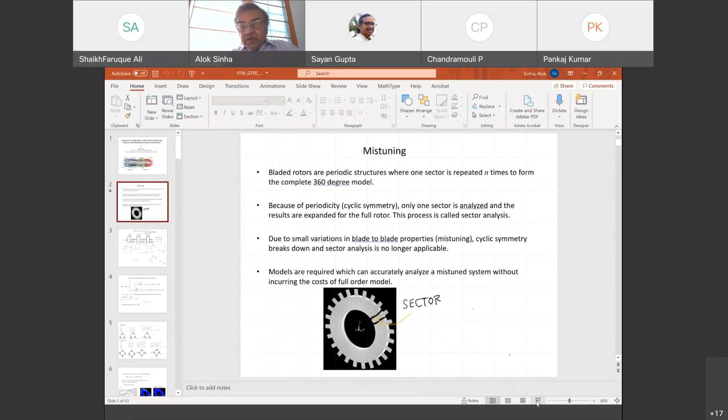Okay, so what do we really mean by mistuning? Bladed rotors are periodic structures. So here is an academic rotor with 24 blade-like structures. This is called a periodic structure, because there are as many sectors as the number of blades, and this is periodic since these sectors are basically repeated n times, where n is the number of blades, to form the whole bladed disc.

So therefore, computationally, I can just model just one sector and obtain all the dynamic characteristics, like natural frequencies and mode shapes, of the full bladed disk assembly. So that is very computationally efficient.

But because of inevitable small variation in blade-to-blade properties, which is called mistuning, cyclic symmetry breaks down, and then sector analysis is no longer applicable. Also, this problem is stochastic in nature—these variations are random, right? So just modeling one rotor is not enough.

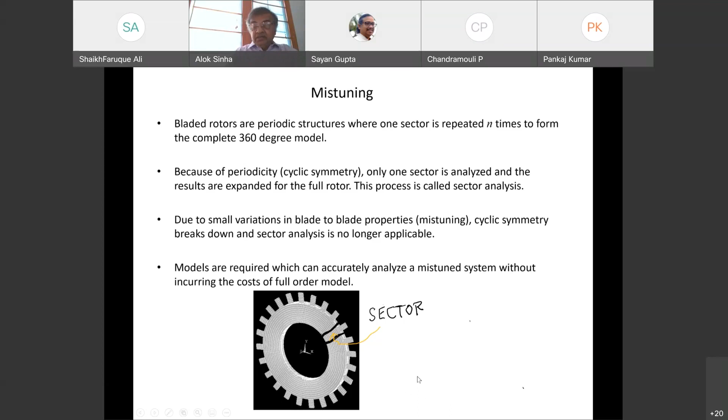You have to think in terms of probability distribution of amplitude—what is the probability that amplitude exceeds a certain critical value? So therefore, we have to develop a high fidelity reduced order model, and that's one of the main topics of the presentation.

Before I start, I want to discuss some basic characteristics of a rotationally periodic structure. Here is the most basic model of a bladed disc, where each blade is represented by one mode of vibration, represented by modal mass Mi and modal stiffness Ki, and Kc is the coupling stiffness. As I've shown in this dotted box, that is one sector in this case, and this sector is repeated n times, where n is the number of blades, to form the whole 360-degree bladed disc.

Now, since the sector is a single degree of freedom system, if all blade masses and modal stiffness are identical, I can come up with a single degree of freedom model, irrespective of the number of blades. And if you look at the stiffness matrix, particularly for a perfectly tuned system, this is a cyclic or circulant matrix—each row of this matrix can be obtained by a simple shift by one slot of the previous row, and that is a reflection of cyclic symmetry. So even though this model is simple, even when we do the finite element analysis of the full rotor, this structure of the model retains.

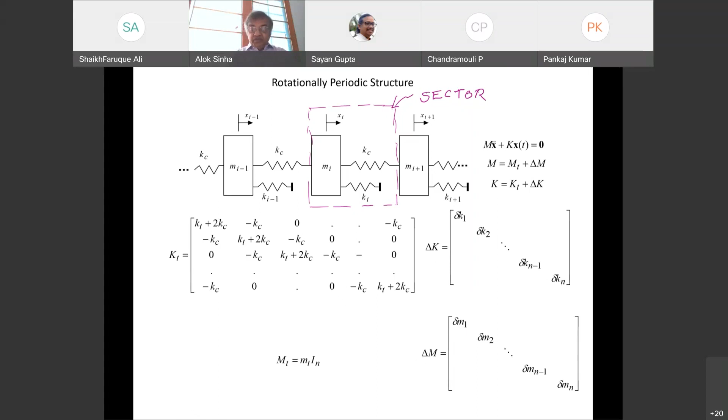Here the delta K is a diagonal matrix, is a scalar, and delta M, there is a change in mass matrix and stiffness matrix due to mistuning. So these structures have this important characteristic.

If I look at the eigenvalues and eigenvectors of a perfectly tuned system, in this simple model, I can come up with a closed form expression of eigenvalues.

So the point here is that there are repeated eigenvalues, and it is n minus 1 over 2 for odd number of blades, and n minus 2 over 2 for even number of blades. And these repeated eigenvalues define the characteristic of a bladed rotor, okay?

And so the eigenvectors turns out to contain constant interblade phase angles. So there are n interblade phase angles possible, where it is integral multiples of 2 pi over n.

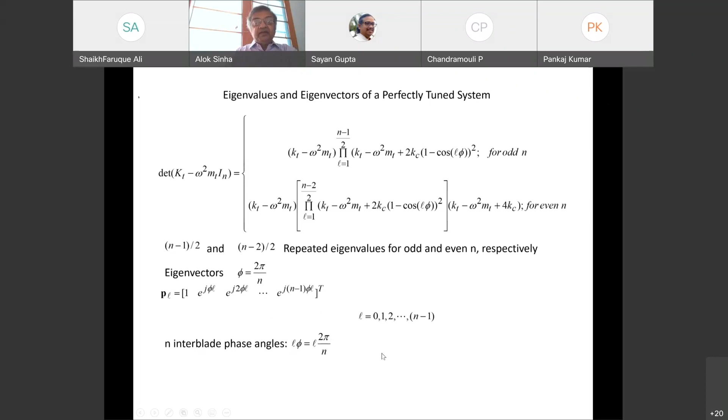So if I look at this case for n equals 3, there are 3 modes: all blades having same phase and same amplitude, then there is 120-degree interblade phase angle and 240-degree phase angle.

And it so happens that if you look at the 120-degree interblade phase angle and 240-degree interblade phase angle, these modes correspond to the same frequency. You can see there is a forward traveling wave and backward traveling wave, and the structure doesn't see any difference.

And there are repeated eigenvalues. So in the odd case, the 0-degree interblade phase angle is the only one that corresponds to an unrepeated eigenvalue. For even number of blades, you have interblade phase angles 0-degree, 90, 180, and 270.

90 and 270-degree interblade phase angle mode shapes correspond to the same frequencies. And here 0-degree and 180-degree interblade phase angle mode shapes correspond to unrepeated eigenvalues.

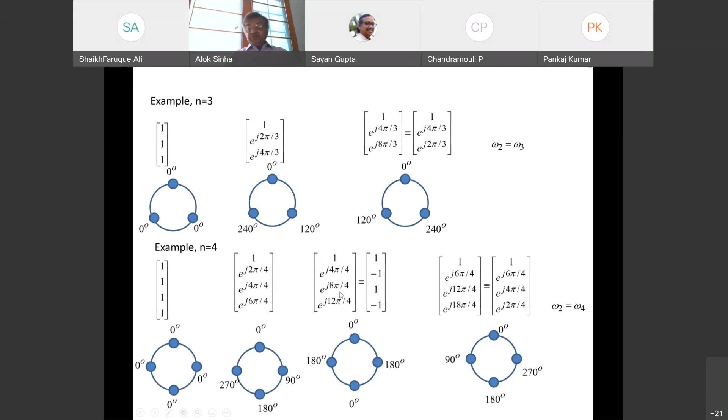So when eigenvalues are repeated, eigenvectors are not unique, right? Because any linear combination of those two eigenvectors corresponding to repeated eigenvalues is also an eigenvector. So in a perfectly tuned system, there is no unique eigenvector, but the moment it is mistuned, these repeated eigenvalues split, and there are unique eigenvectors.

And not only that, when the modes are close together, like you can see in the nodal diameter map, which is basically natural frequencies versus the interblade phase angles known as harmonic index, there are many frequencies close together.

So once it gets mistuned, there is a lot of modal interaction, and that can lead to veering or mode localization.

So here you have an example of mode localization. It's a very small change in the thickness of a blade, and you can have one mode where only one blade is basically vibrating, and that's a mode localization.

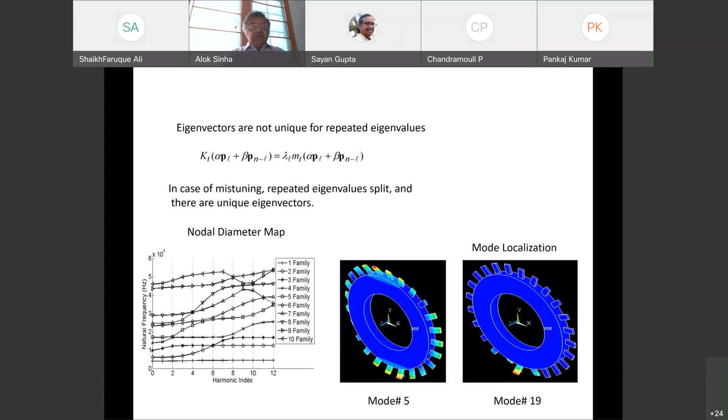However, in gas turbine applications, it's the forced response which is important, because there are always non-uniform pressure fields circumferentially, and when the blade is rotating, it automatically leads to periodic excitation.

And then if you do the Fourier series expansion, there are integral multiples of rotor speed, which turn out to be possible excitation frequencies. But for resonance in this structure, two conditions have to be satisfied.

First of all, natural frequency has to equal one of the integral multiples of rotor speed. Secondly, the associated mode shape, where this natural frequency has a resonance or frequency matching, must be contained in the spatial variation of the pressure field.

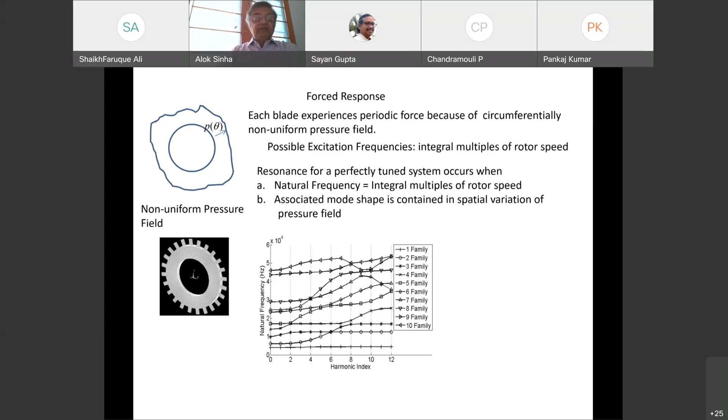Otherwise, energy will not get transmitted to that mode for a perfectly tuned system. So this is what is very important from a forced response point of view, which is present in a gas turbine engine.

There are two issues. A lot of people in the literature say vibration mode localization. But if there is mode localization, that is mode shapes are localized, it does not necessarily mean that forced response will be localized. So there are two different mechanisms that we have to be aware of.

So if we look at the forced response, in a very simple way, if I look at the transfer function, that is from the response of a blade to the excitation at a particular engine order excitation or particular interblade phase angle, in this case the transfer function will have a numerator and denominator.

For a perfectly tuned system, numerators are all equal, and there are many pole-zero cancellations, because this denominator will be essentially 2nth order, right? It's n masses, so the number of eigenvalues will be 2n. But there are many pole-zero cancellations for a perfectly tuned system, and essentially it behaves like a single mode, single degree of freedom system. Okay, but the moment it's mistuned...

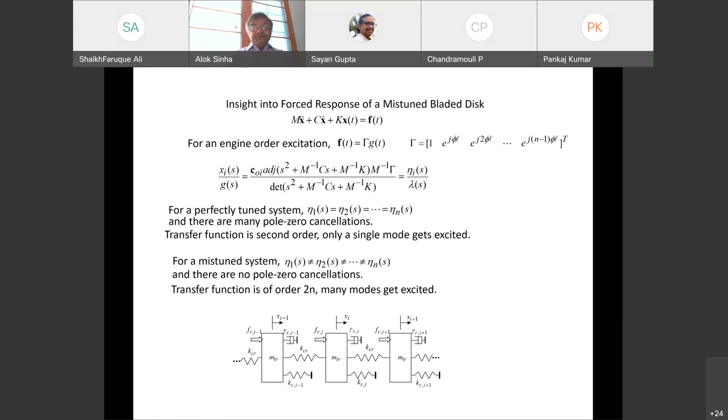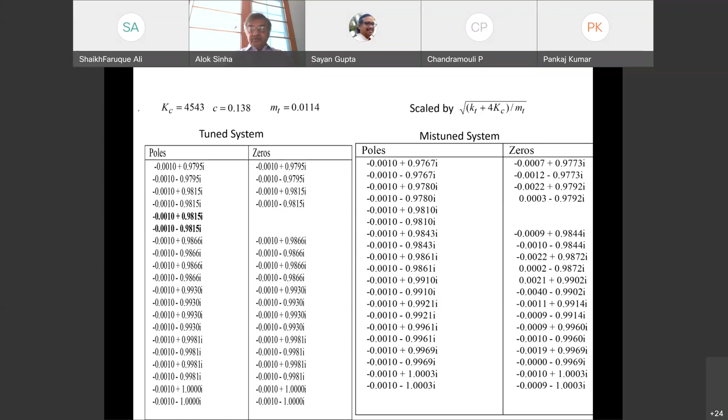Here are examples of pole zero cancellation for a tuned system. Only the poles, single pole, complex conjugate poles become effective, and it acts like a second order system. Whereas in a mistuned system, there are no pole zero cancellations, so the order of the system increases, and the energy can get transferred to many modes. So that is the mechanism.

So now let me get back to geometric mistuning. This is an example of an integrally bladed rotor, or blisk, chosen because it's aerodynamically efficient. There are reduced number of parts, which is very favorable, but it has very low damping in the system, and there is blade to blade geometry variation.

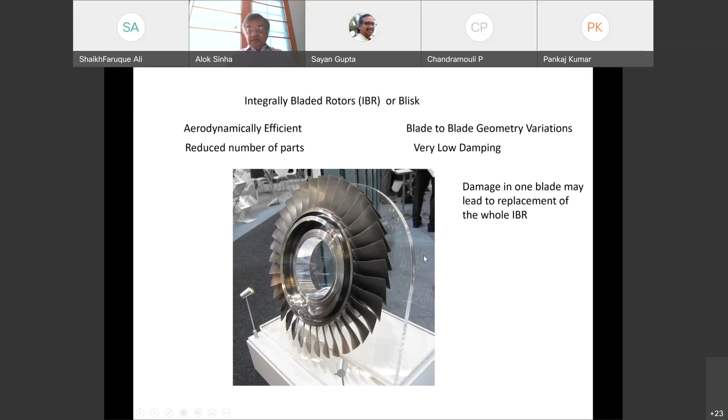So when there is a lower amount of damping, this mistuning effect, or vibration localization due to mistuning, is an even bigger problem. And another disadvantage is damage in one blade may lead to replacement of the whole IBR. So that's the integrally bladed disc.

So how do we develop the reduced order model for that? In this example, there has been a lot of research. I think the first paper on mistuning occurred around the early 60s, so almost 60 years of research on mistuning has been going on.

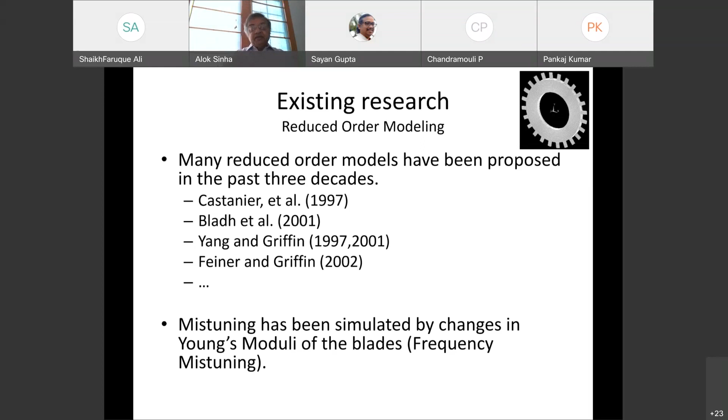More recently, in the last 3 decades, many efforts have been made to develop a reduced order model. But all these efforts focused on modeling the mistuning by change in frequency alone, where mode shape change in the blade was neglected. It seems like it worked very well for many systems. So what is frequency mistuning?

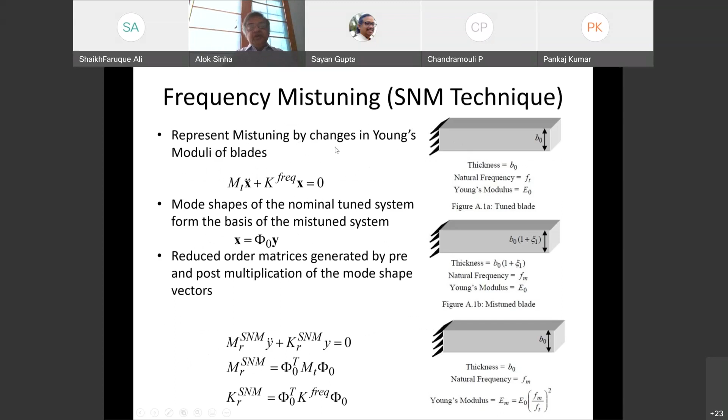We represent mistuning by a change in Young's modulus of the blades. So we have a nominal thickness geometry B naught for a blade, and if this blade's thickness changes by some amount, its geometry is changing. What we do is find the natural frequency of this blade, then revert back to the same thickness of the blade, but change the Young's modulus of this blade to match the frequency of the mistuned blade.

So that is what frequency mistuning is, and based on that, the SNM technique has been developed to create the reduced order model. Quite simply, in this case, there is no mistuning in the mass matrix, just the stiffness matrix, which is denoted as K frequency.

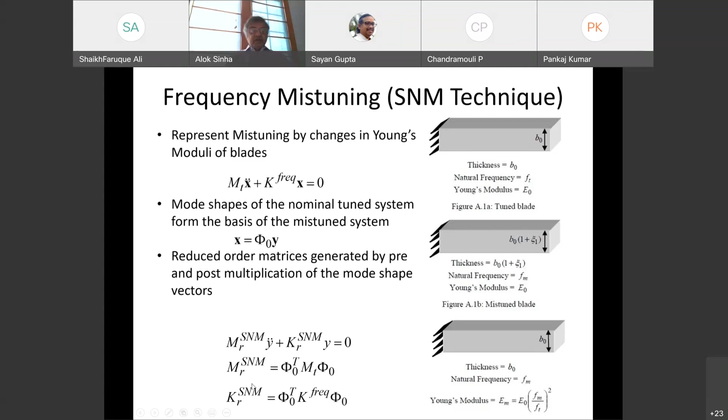Then we choose a certain number of modes of the tuned system, represented by matrix phi naught. That becomes my approximation, where y is the modal coordinate. And then I can come up with the reduced order mass matrix and reduced order stiffness matrix.

So when this method was applied to geometric mistuning, people were not able to get a good reduced order model. It was very frustrating to many researchers, because any mistuned mode is a linear combination of all the tuned modes, since tuned modes are a complete set of eigenvectors. So people were wondering why it wasn't working, because in SNM or frequency mistuning, you are trying to represent a mistuned mode as a linear combination of tuned modes.

But the problem is that we do not want to take all the tuned modes, right? So the idea was to consider only those tuned modes which are in the frequency range of interest. That approach was not working when there is geometric mistuning, which leads to simultaneous and dependent perturbations in both mass and stiffness matrices.

So I came up with a new approach, which I am calling Modified Modal Domain Analysis. Essentially, modal domain analysis required a large number of modes, and because of geometric mistuning, we needed to move in the vertical, orthogonal direction. That's what this MMDA does.

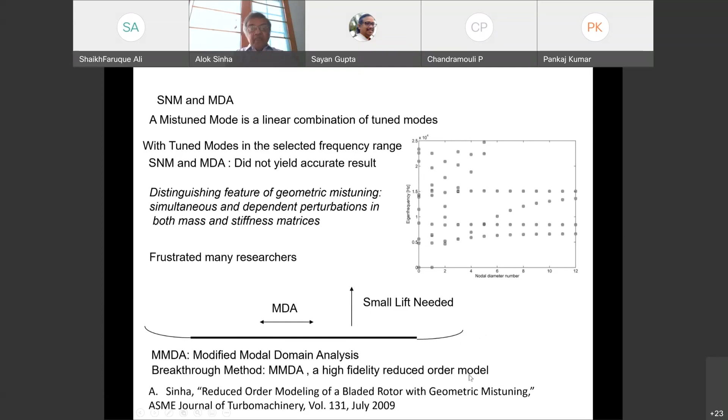This MMDA is based on proper orthogonal decomposition, POD, of coordinate measurement machine data on blade geometries, and we only use sector analysis using ANSYS and a solid modeling model.

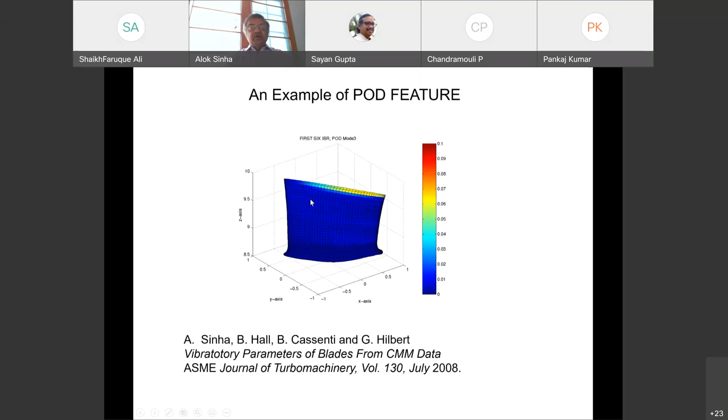So this is an example of a POD feature, based on actual CMM data. We have the coordinate measurement machine, and then we do the singular value decomposition, and I can get a POD feature. Here, the color bar indicates the magnitude of the geometry change. So that's one of the POD features.

Okay, so in this MMDA, the modification is that in my basis vectors, we have Phi1, which was in the original reduction, that is R tuned modes with blades having average geometry. In addition to that, I created more basis vectors, and they are R tuned modes with Phi-L, tuned modes with blades having perturbed geometry along the POD feature or mode that I want to consider.

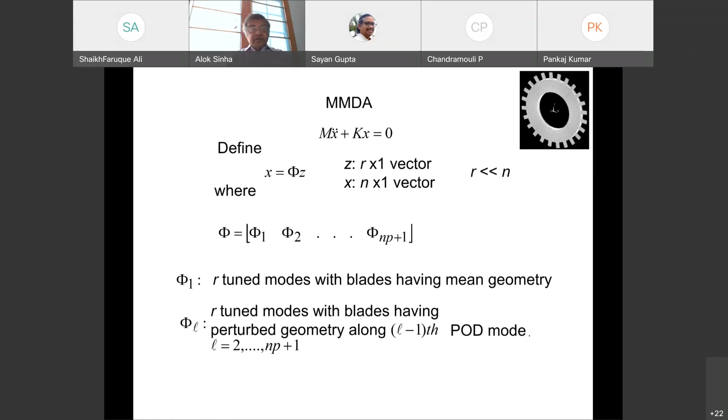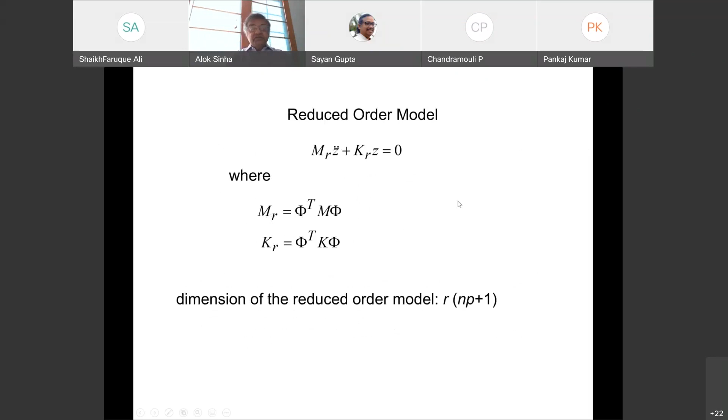So NP is the number of POD modes that I am considering. The geometry is perturbed, but again, all blades are perturbed by the same amount, so I can still do the sector analysis. This is important because industrial scale bladed disk finite element models have millions of nodes, so we really want to avoid the full rotor analysis. Then we have this reduced order model where I have a reduced order mass matrix and reduced order stiffness matrix. These are the sector analyses required by MMDA.

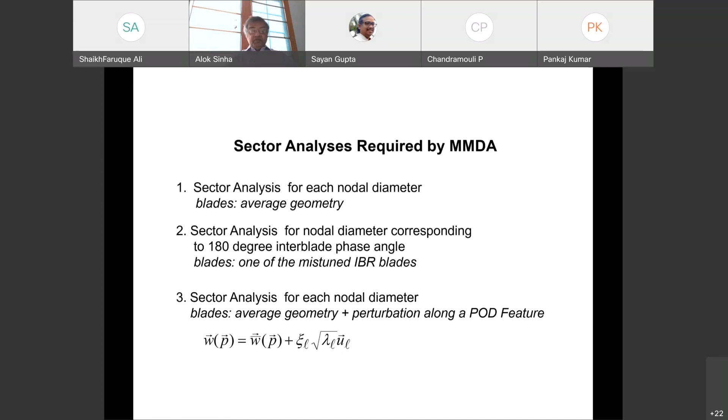So for the average geometry, we do the sector analysis for each nodal diameter. And then we also do sector analysis for nodal diameter corresponding to 180 degree or 0 degree interblade phase angle blades. I do this for each mistuned IBR blade, and then subtract it from the mass matrix and stiffness matrix of the average blade to get the delta M and delta K due to mistuning. Then I also do sector analysis for each nodal diameter where blades have average geometry plus perturbation along a POD feature. So these are the data that we have to generate using ANSYS.

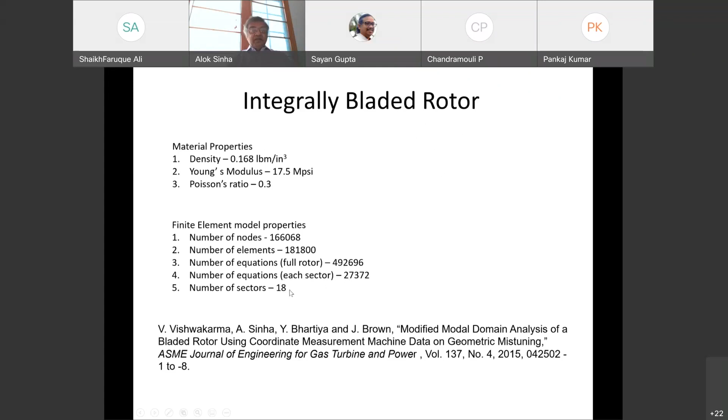So I'm going to present an example for an integrally bladed rotor, an industrial scale integrally bladed rotor, using actual coordinate measurement machine data. The full rotor model has a number of nodes, 166,068. So for each sector, you can see the reduction in the number of equations for each sector versus the full rotor. And there are 18 blades.

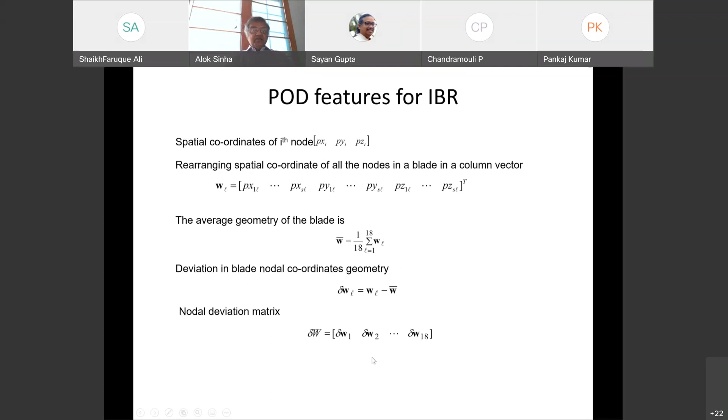Okay, so how do I calculate the POD feature? If I take the spatial coordinates of the ith node, and then rearrange all the spatial coordinates of all nodes in a blade into a column vector - this is for the lth blade, one blade - then I can calculate the mean over all 18 blades, and then calculate the deviation in blade nodal coordinate geometry. Then I stack them up: the first column is delta W1 for the first blade, delta W2 for the second blade, and delta W18 for the 18th blade. Then I do the singular value decomposition.

And then POD features are the column vectors of this matrix U, and weights of the POD features, the singular values, are sigma, and here it is plotted for this so-called Purdue rotor POD. You can see the singular values, and the first few features are more important in representing geometric mistuning, but even the smaller features are not dying out - they are still there, although small.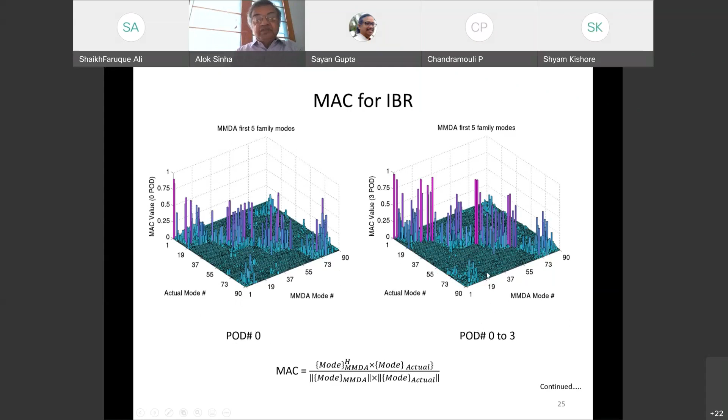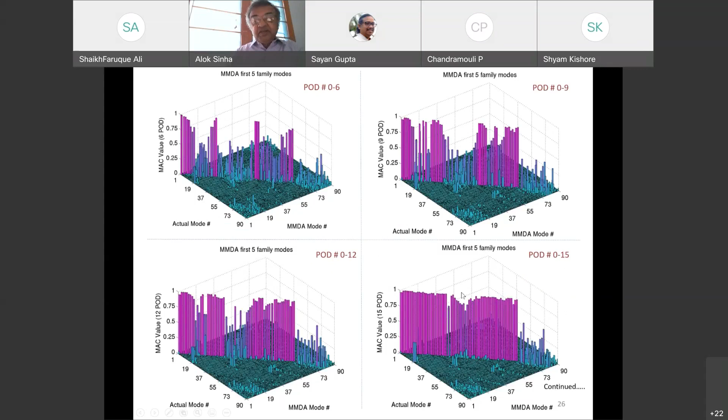MAC has to be 1 for exact match of the mode shapes. As I increase the number of POD features, the results are getting better. When I have at least all the 15 POD features, things are looking very good. And when I consider all the POD features, the reduced order model looks good, almost exact. And that was not the case for the frequency mistuning modeling.

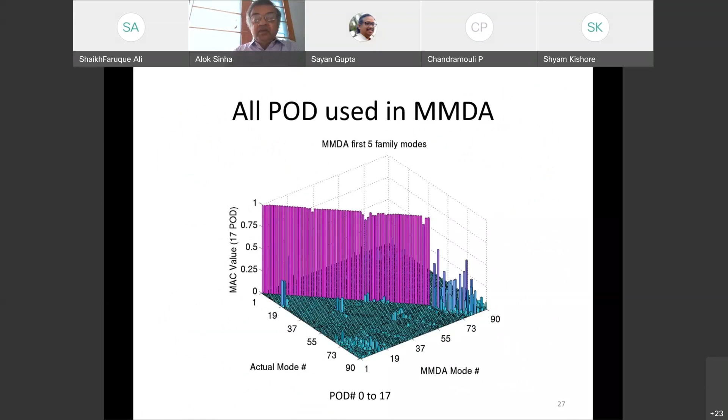And here are the frequency deviation results. Are there any questions?

Yeah, Pankaj, can you mute yourself? Okay, so shall I just continue? Are you listening? Is everything going okay? Is the technology working okay? Yes, Professor Alok, you can continue. You can have a question answer session at the end of the presentation.

Okay, good. So we have this frequency deviation with respect to tuned frequency. And again, as I am increasing the number of POD features in the reduced order model, results are getting better. Actual means result from the full 360-degree ANSYS analysis, and with 17 POD features, it matches the actual frequency deviation very well.

Now, here are the results from FMM and SNM, the reduced order model approaches using frequency mistuning. You can see large error here in frequency. So here I am using error D, which is frequency deviation error. You can see how I am calculating this. Now, in the literature, most of the previous papers use this measure.

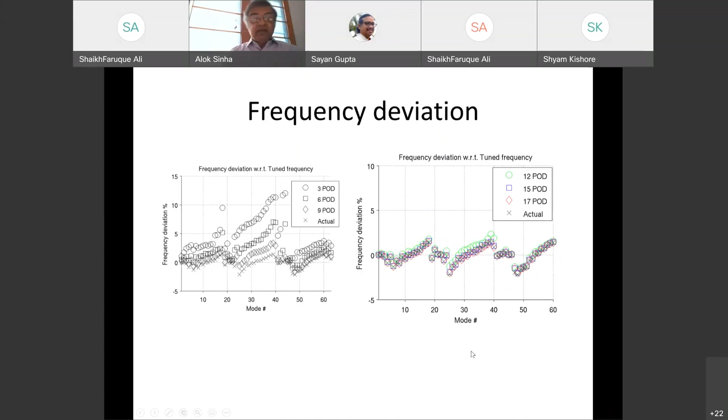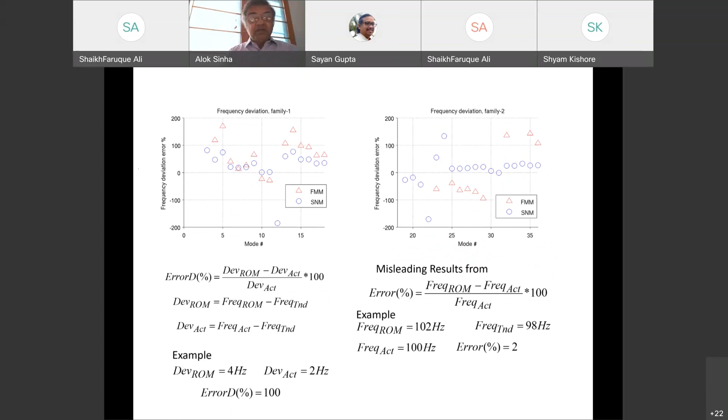So if you do error D percent, which I have defined, I'm trying to predict a 2 hertz change, but my reduced order model says 4 hertz. So that will mean 100% error, right? So in that measure, FMM and SNM do not do good. This measure also says that when you are not able to predict frequency deviation, you will not be able to predict the mode shapes. And this good match is shown by using the very stringent, very tough measure like error frequency deviation percentage error. So that shows that frequency mistuning is not adequate to model geometric mistuning.

And here are the mode shape comparisons from frequency mistuning approaches, so-called SNM and FMM, and you can see the MAC are not good. SNM takes more number of modes and is better, but is still far from being perfect. FMM is totally off.

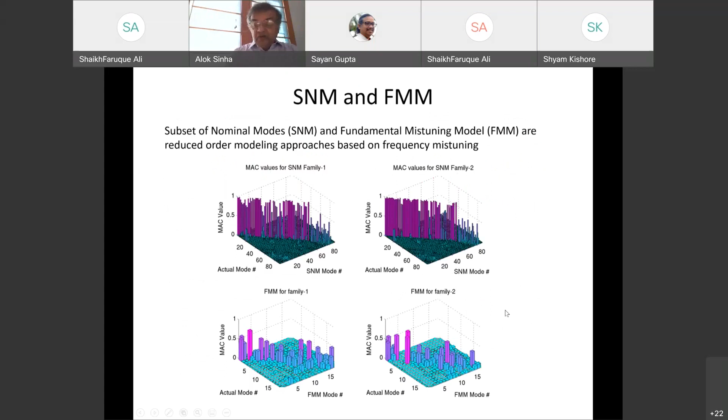And here are the forced response results based on the reduced order model. This also shows you the effect of mistuning. This blue line is the tuned system response. As I said earlier, for a tuned system, energy just goes into one mode, and you can see that this behavior is like a single mode resonance, right?

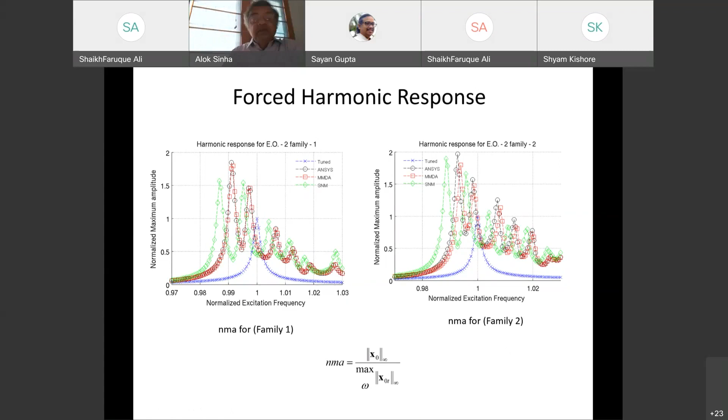Now, the moment it becomes mistuned, energy gets into many modes, and there are multiple peaks. If you look at the ANSYS results, the full 360-degree analysis, there are two harmonic responses depending on the resonant frequency that I am using. You can see there can be amplification of amplitude by a factor of 2, right? And again, the frequency mistuning approach does not predict the forced response well, whereas the MMDA results are very close to the full 360-degree analysis.

Okay, so next I'm going to talk about system ID. Is there a time limit? How much time do I have? 15, 20 minutes? Yeah, you can go ahead with another 15 minutes, no problem. Yeah, okay.

So this is system identification for using blade tip timing data. We want to predict the vibratory behavior of blades at the design stage. We have 4 components to do this: a good model of the mass matrix, stiffness matrix, damping matrix, and the forcing function.

So we can claim that MMDA provides a high fidelity reduced order model. We have a good model for mass matrix and stiffness matrix, provided we know the geometric mistuning, that is, we have the CMM data available. Damping matrix and forcing function still cannot be accurately computed in spite of advancement in CFD techniques.

When blade geometries are not easily measured, there is a need to estimate blade alone natural frequencies and mode shape. So to estimate mistuned natural frequency of each blade, many techniques have been developed with the assumption that forcing functions are known, which can be valid for traveling wave type excitation commonly used in laboratory settings.

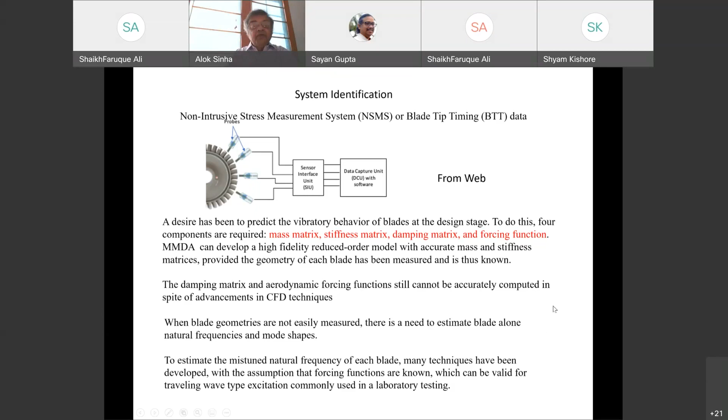First of all, we developed an algorithm for identification of forcing function from measured vibration data. The approach is to represent the sinusoidal forcing function as a solution of a second order differential equation. So we can convert the force estimation problem into a state estimation problem, for which we have used a Kalman filter.

However, here we have assumed that there is no modeling error; the model is perfect. We published 2 papers, and one of the key findings is that the Kalman filter approach is very robust to measurement errors.

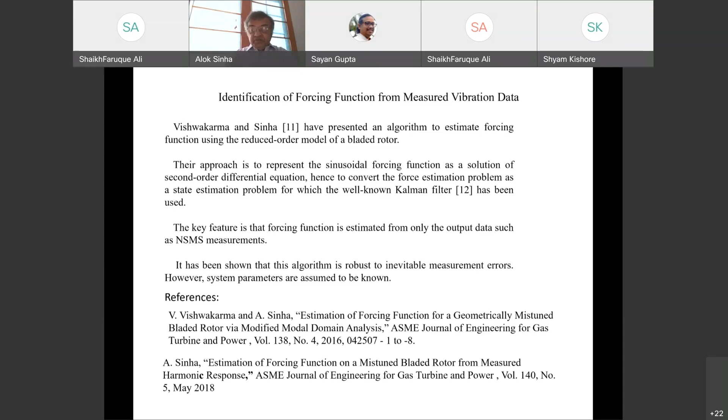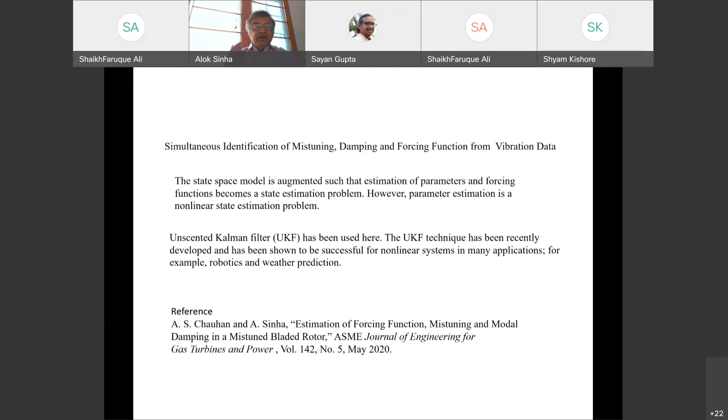So I'm going to talk briefly about simultaneous identification of mistuning, damping, and forcing function from vibration data. Here I'm going to use the unscented Kalman filter, and it has been shown to be highly successful for nonlinear systems in many applications. So that's the model of the unscented Kalman filter.

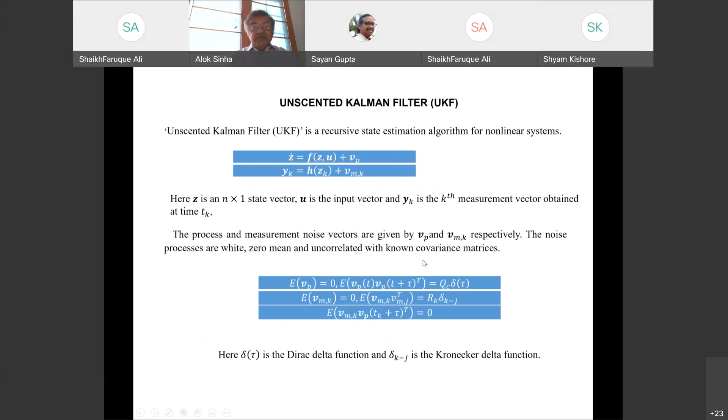We create the statistics of the states before the measurement is taken, and based on these statistics, I can determine the so-called Kalman filter gain K. After the measurement comes, I modify my estimate. That's the way it works.

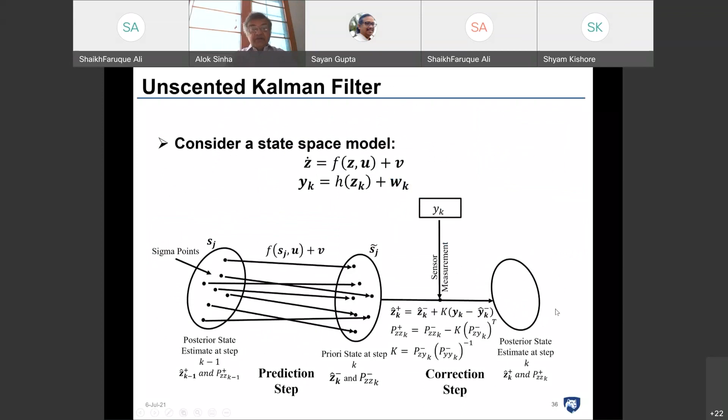We applied it to our simple spring mass model, and we are going to do simultaneous identification of the damping, forcing function, and mistuning.

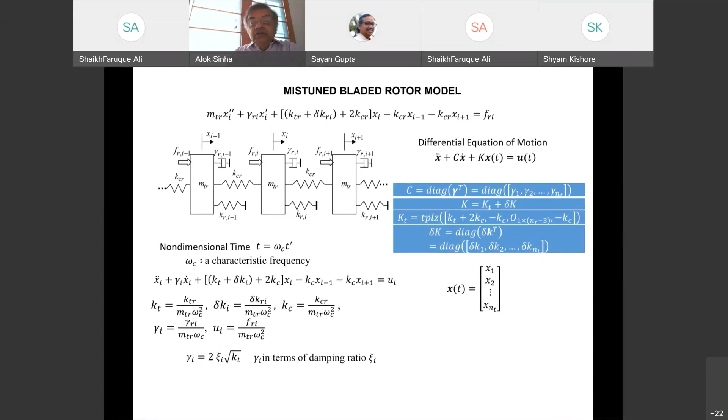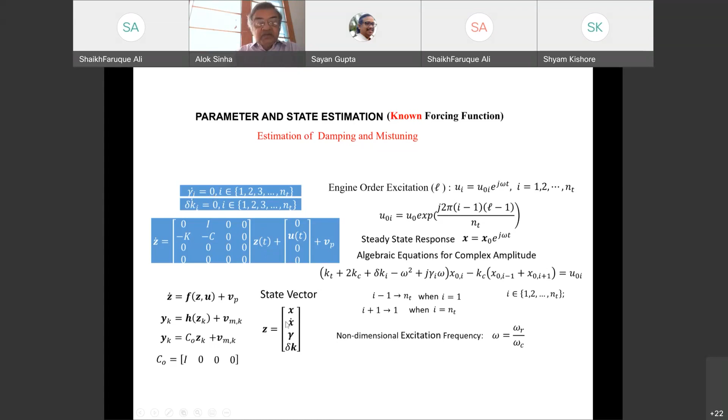So we have equations: gamma dot is 0, and it becomes a state equation, and delta K dot is 0. That's another state equation. Those become, so I'm doing the state estimation here.

Here are the excitation, known excitation, sinusoidal excitation with L equals 2. So engine order excitation for a 10 blade, interblade phase angle will be 2 pi over 10, 36 degrees.

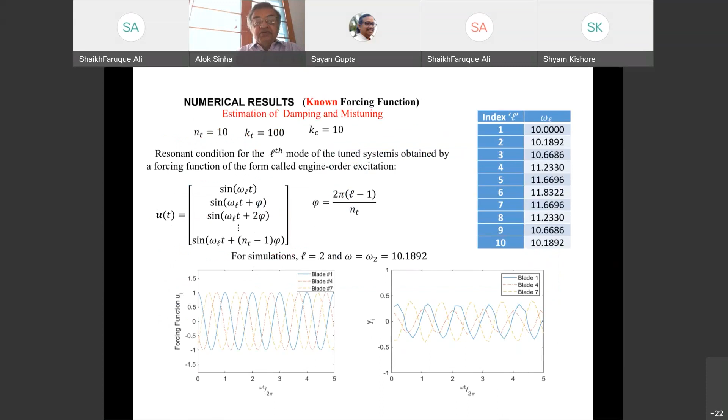Okay, and these are some of the measured responses with noise and everything. That's the result, that's the response we are using to get the damping coefficients, and it predicts very good results. Here the red line is the actual value, and the algorithm is giving good identified damping coefficients.

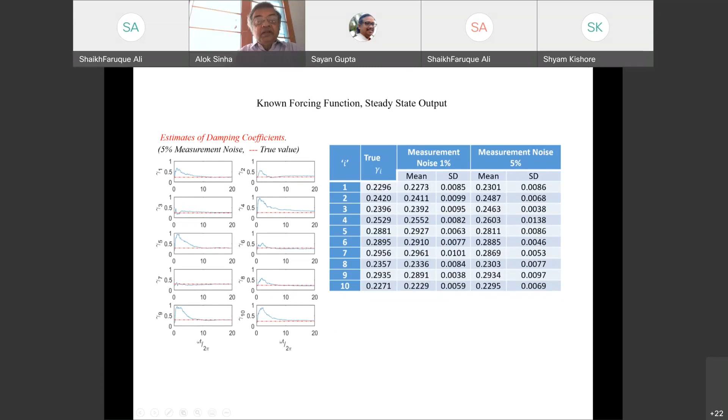And similarly, it identifies the mistuning very well. These results are for 2 levels of noise.

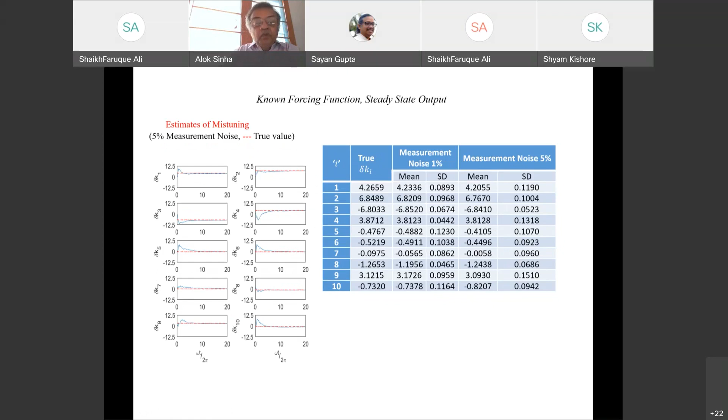Now with unknown forcing function, we have this equation u double dot plus omega squared u equals 0, so u is the unknown forcing function. I have augmented my state space model with 2 additional states, u and u dot. Now in this case there are 3 NT unknowns: gamma I, delta Ki, and U0I.

And we have only 2 NT algebraic equations if I use the steady state response. So when we use the steady state response to do this simultaneous identification of damping, mistuning, and forcing, it was not working, and we realized that steady state response does not have sufficient information. Therefore, we use the transient response, that response before it settles into steady state.

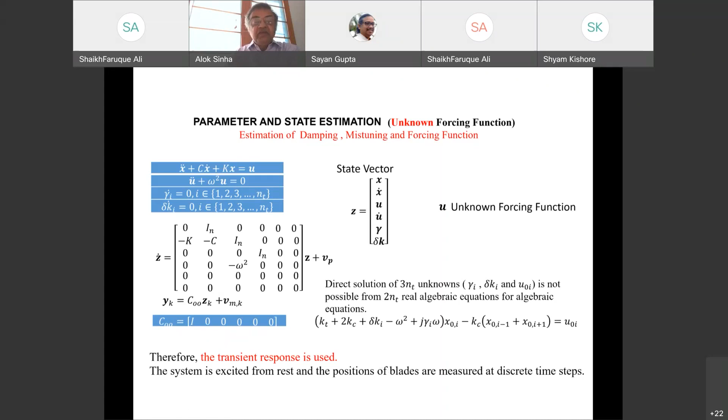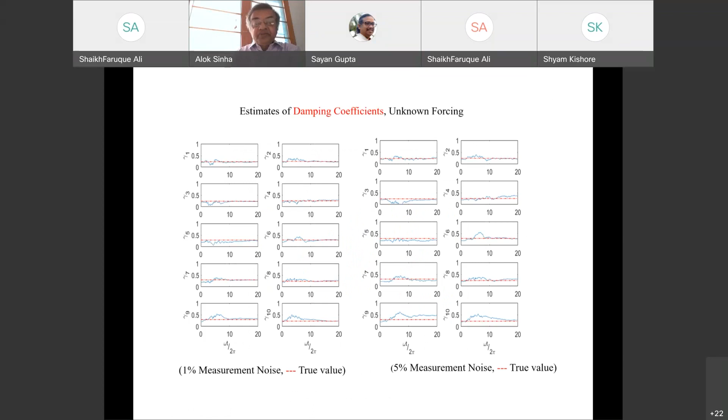So this is the data that we use, measured data, transient response, and we find that results are pretty good. Again, the damping coefficients, unknown forcing, we are getting very good results. Mistuning, we are able to do the identification very well.

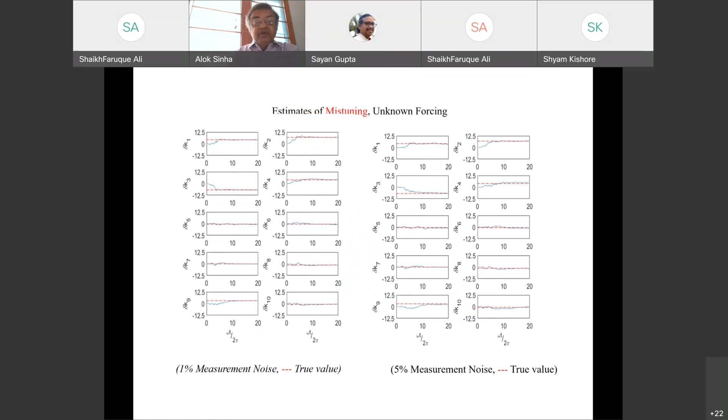And this is the estimation of forcing function. So this is delta F1, which is the error. It should be 0 ideally.

Okay, so it looks like it's not working that well. But when I look at the Fourier coefficients, the results look very good.

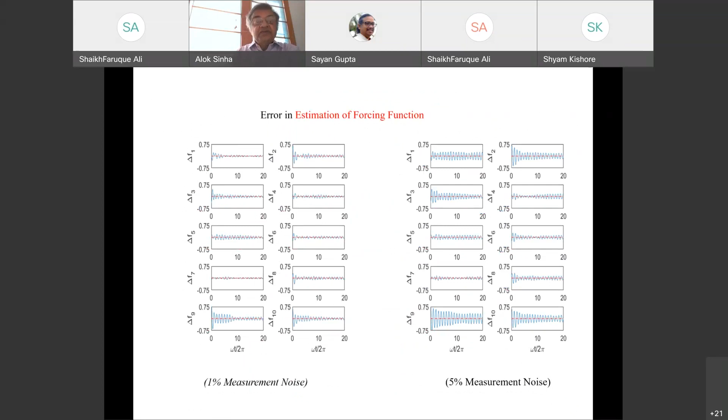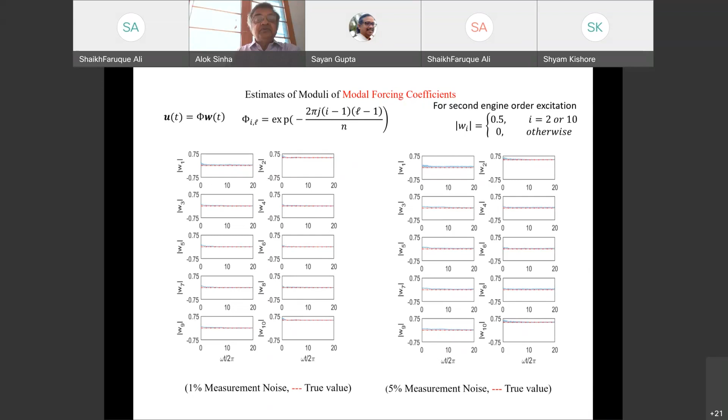So if I look at the Fourier coefficients, since it's a second engine order excitation, that's what we have provided. For that, only the second and 10th coefficient should be 0.5, and the others should be 0. And when I look at that measure, indeed, the results look very good.

So we are able to identify the unknown forcing function. We have two different approaches. When the forcing function is known, we can do mistuning and damping using the steady state vibration. But when the forcing function is not known, we must use transient vibratory data.

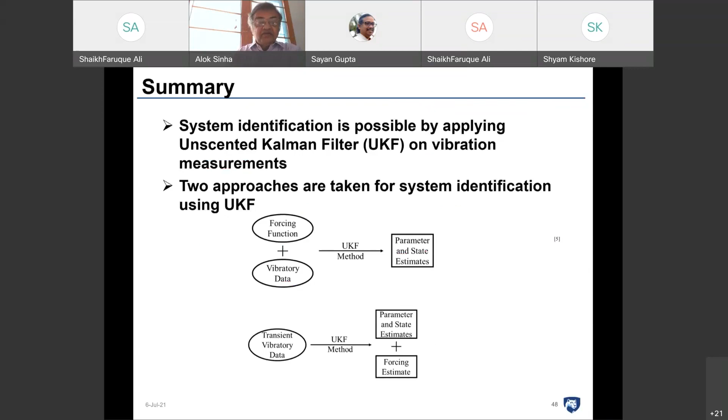And we have also applied it to the frictionally damped case. There are friction dampers in gas turbines to reduce the resonant vibratory amplitude, but it makes the system non-linear.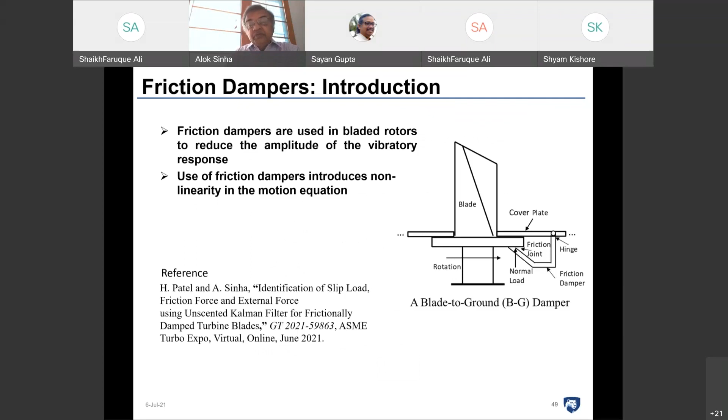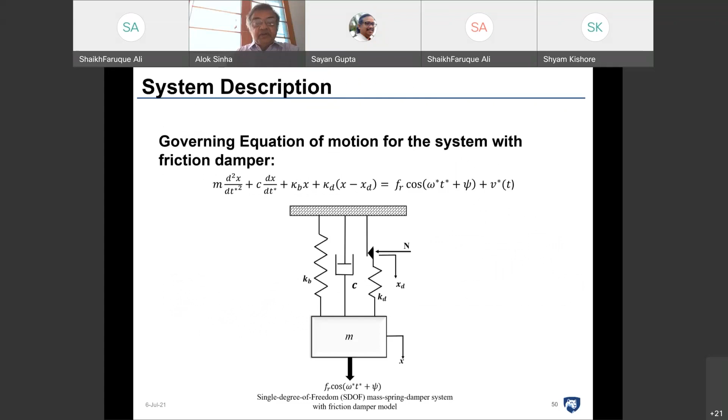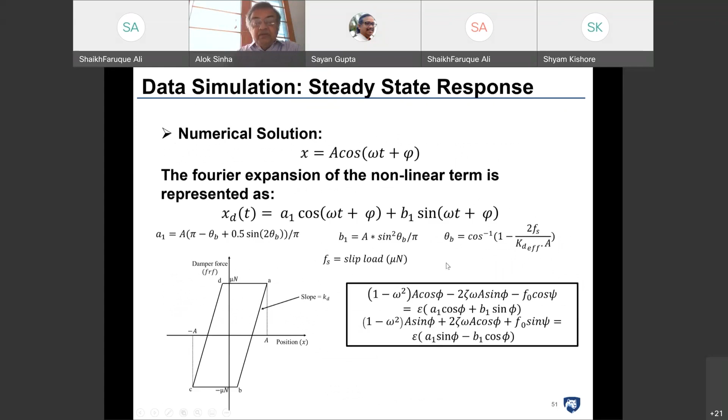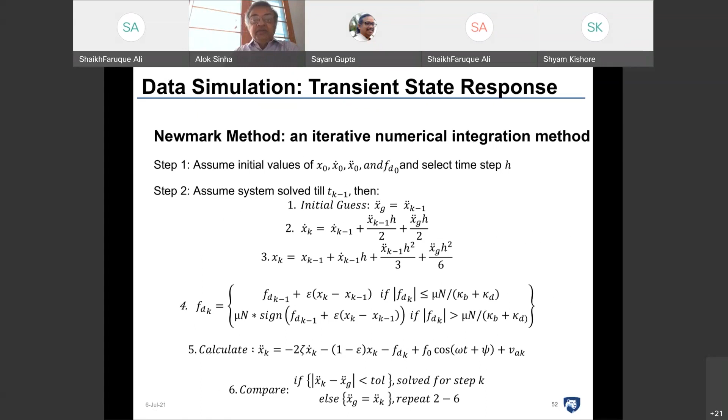This is a single mode of vibration with a frictionally damped system. If the forcing function is sinusoidal, then the response can be sinusoidal with the hysteretic loop. We have used the Newmark method for integration, which is a standard method for structural dynamics.

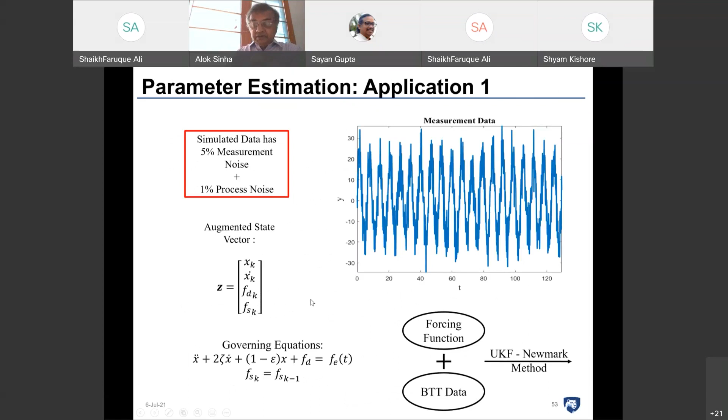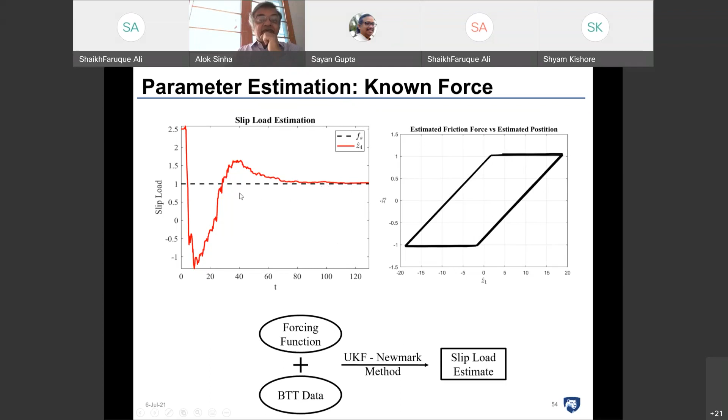In this case, my state vector has the friction force, FDK, and the slip load, mu n. We are trying to identify these quantities, and the unscented Kalman filter is able to identify the friction force and the slip load, whose actual value was 1, quite well.

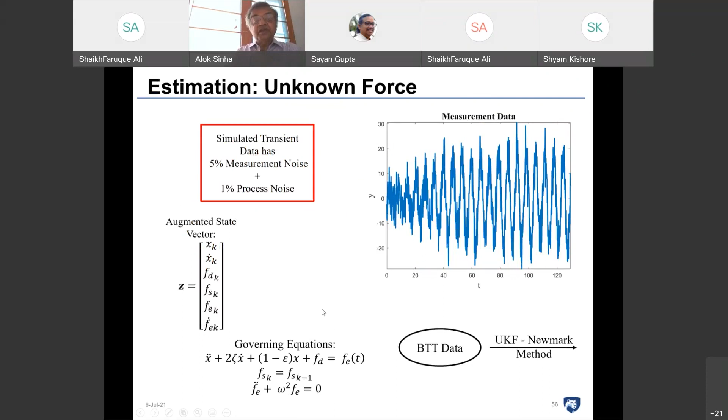Then we have extended it to the unknown forcing function. There are two additional states, FEK and FEK dot, for the unknown forcing function. Again, we have to use the transient vibration data, and we get a very good result for this case.

So we can estimate the forcing function, friction force, and the slip load.

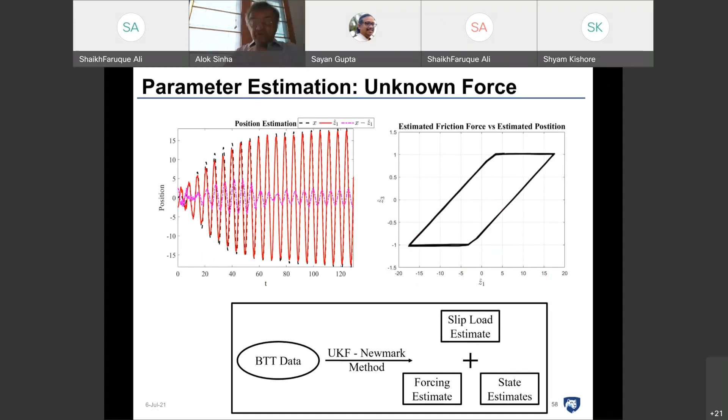In conclusion, we have presented MMDA as an accurate reduced order model of a bladed rotor with geometric mistuning. The unscented Kalman filter has been successfully used to identify mistuning, damping, and forcing function from measured vibration data. And we have extended it to frictionally damped blades by integrating the Newmark method and UKF.

Okay, so any questions? I think I will stop here and take any questions you have.